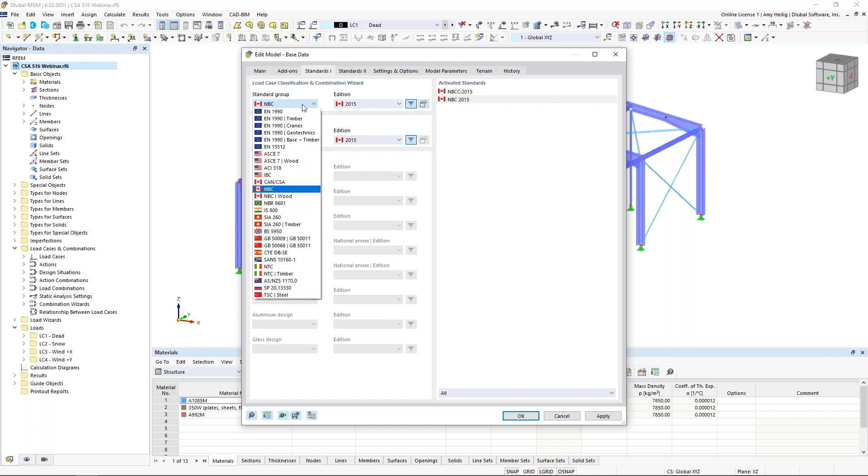Under the third tab, standards, we are going to generate our load combinations automatically according to the NBC 2015 standard. We are working in development on the 2020 standard, so that should be released fairly soon. But we also have access to all of our other international standards like the ASCE 7, the Eurocode, and many more.

So once this base data has been defined, we'll review the cross sections within the model. Over on the left, we can see all of the available cross sections here, including our moment frames, which are going to utilize W250 by 80 sections. We have some tube sections, HSS 127 by 127 spanning between these moment frames.

We have our lateral bracing here, which is going to be single angles. And then we have some pretty slender HSS columns at the front and the rear of the structure. Now notice that for these main moment frames here, these particular beams, we do have these set to a taper.

So if we double click on these under the second tab, we can define a taper for any of the members, either at the start of the member or end of the member, and some additional options here. We even can set the alignment here to the top of member.

So notice that the members start - I've converted this W250 by 80 to a parametric section and increased the depth to 500 millimeters, and then we transition back to the W250 by 80.

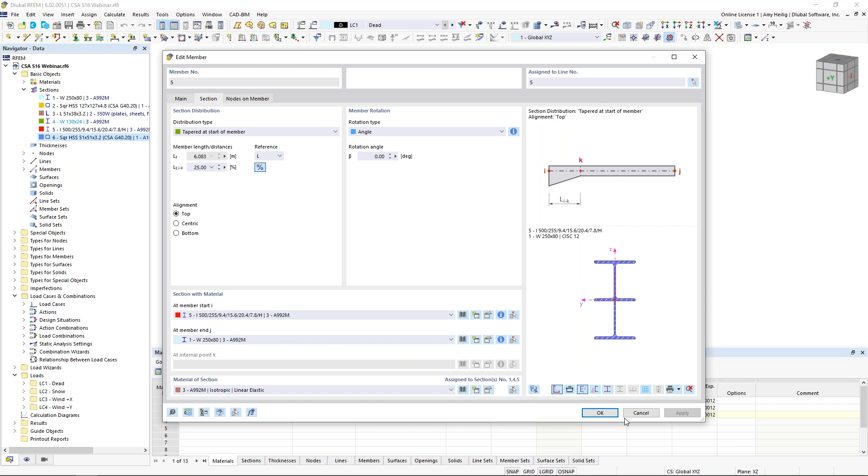We also have our materials listed here. So most of the HSS sections will utilize the A1085. Our single angles will be 350W, and our W sections will be A992.

What else is unique about this structure are the various member types. So if we visit our navigator and the second tab in particular under display, this is going to control everything that we're viewing here in the graphical display.

And if we scroll all the way to the bottom, we can actually render the colors of the model according to the member type. Notice these various member types are now color coded here. So we have our general beam elements, which is nothing more than just a standard beam or column.

If we double click on one of these, the member type is set here under this first drop down. We could activate hinges to release moment. If we leave this unchecked, everything is considered fully fixed.

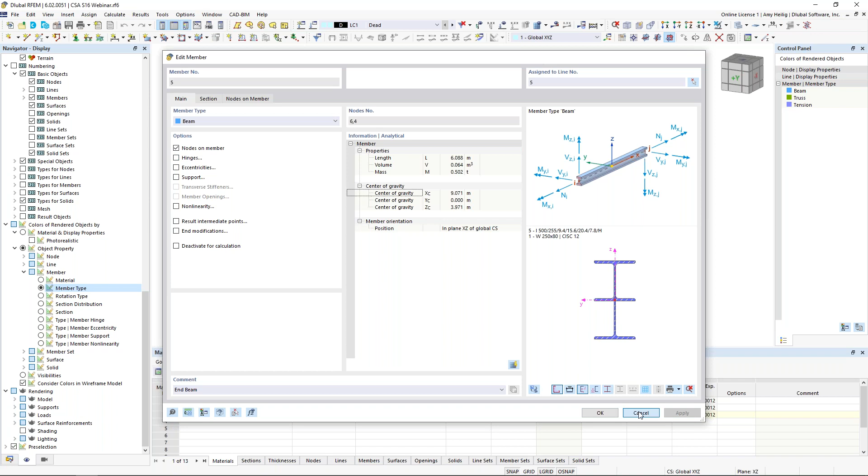But we also have what we call truss elements. So the member type is set to truss. Notice that this hinges option is now grayed out.

And finally, we have our lateral bracing here, which are tension only. So exactly as it sounds, these members can only take tension forces. If they have any compression, they'll be deactivated within the analysis. RFEM is that nonlinear analysis program, so if tension forces are reintroduced in a subsequent iteration, we can reactivate those members.

So now that we've gone over a little bit about the structure, including the sections and materials, let us take a look now at our loads and load cases. So I will activate here my load cases and combinations dialog box.

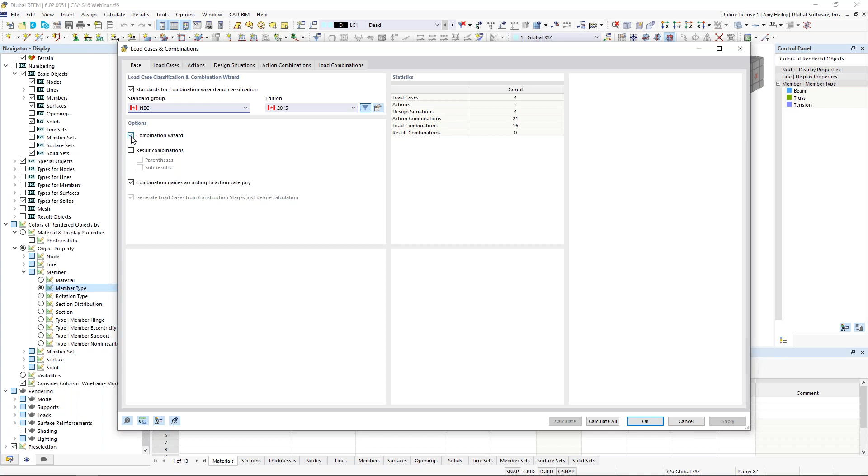Under the base tab here, this is just reiterating that we are going to generate our load combinations automatically according to the NBC standard. When this option is turned on, the program will automatically generate all of our load combinations according to this standard. Now, alternatively, we can turn this off if we would prefer to manually create the load combinations.

The load cases are listed here. So for example, 4 simple load cases for today, we have dead load with self-weight automatically turned on here. The action category is set to dead load. This is specific to the NBC. We also have snow load, wind in the X, and wind in the Y.

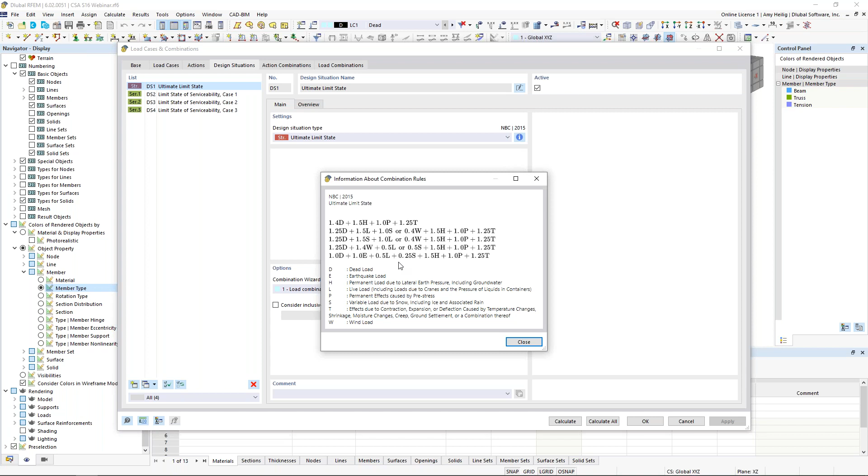So the program will automatically generate for us what we call design situations. These design situations are needed a little bit later on when we do activate that steel design add-on, but it also is going to group together all of our load combinations. So notice that we have an ultimate limit state design situation. This is going to be all of our factored load combinations. And if we'd like to see what this means or what it's referencing, we can click on this little info button here to see directly from the NBC standard those factored load combinations.

Now we have 3 serviceability design situations as well. Again, we can click on this little info button. These are going to be our unfactored load combinations. If we don't want to use all 3 serviceability design situations, we can always uncheck the active box in the upper right hand corner, or we could delete it altogether with this button down here at the bottom.

But notice for these design situations, we have the option definition set down here, and we'll actually be in this dialog box quite a bit today. I just want to point out that initially our static analysis settings are set to second order by default. If we use this drop down, you can see we can modify this to a linear first order, or if we have cable elements or fabric membranes, for example, then we would be running a large deformation analysis, but the default is second order to account for those P delta effects, so something to keep in mind there.

If we jump to the load combinations tab, we can actually see the individual load combinations listed out, again, each belonging to that specific design situation. So here in red, we have our factored load combinations belonging to our first design situation, and then all of our unfactored load combinations belonging to those 3 serviceability design situations.

Each one is showing here that it's going to be run according to a second order analysis because we've already defined that under the design situation. But by all means, you can come in here and make individual settings for each load combination if you prefer.

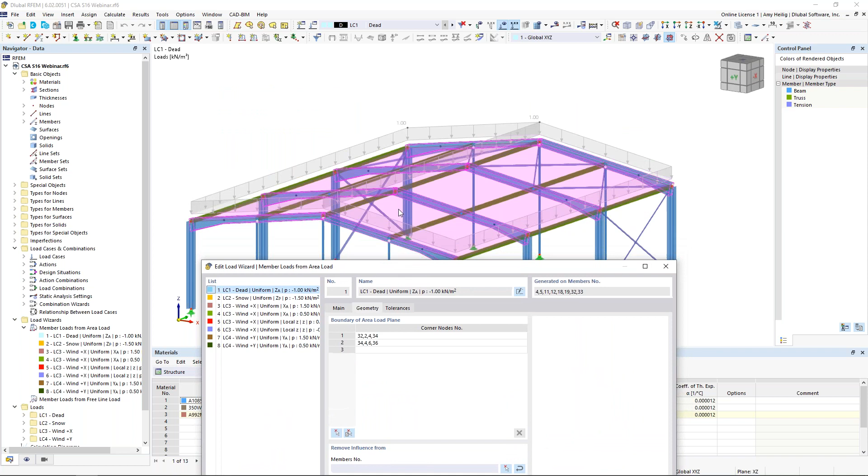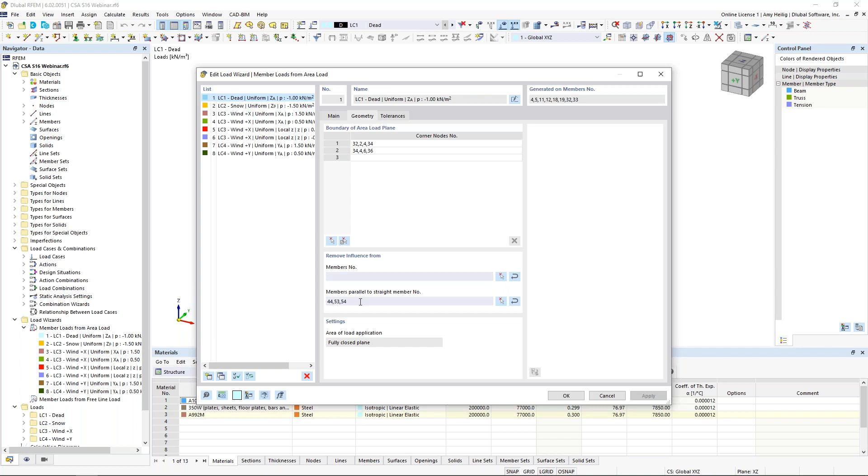I've defined the load magnitude at -1 kilonewtons per meter squared. Under the geometry, these are the 4 corner points that define the left plane and the right plane. I took this a step further so we can exclude members from this generated area load, and I graphically selected these 3 members here, which we can somewhat see on the left-hand side. Not only will the program exclude these 3 members, but it will also exclude all members parallel to it, which is a time saver so we don't have to individually select each member.

Once this is complete, we see this generated area load, where we can right click to display separately, and notice that my load is now being distributed only to those main moment frames here. The tributary area is automatically accounted for, so nothing further to do for dead load. We can right click and turn off the display separately to go back to the previous view.

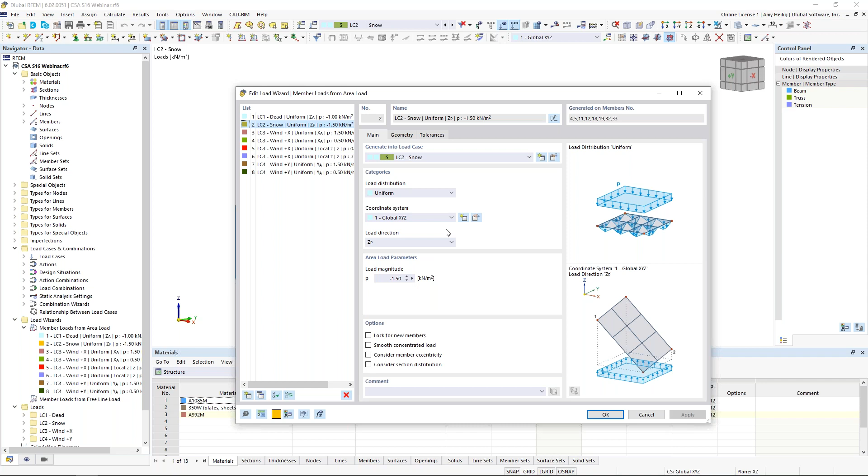As far as snow load, exact same concept here. The only difference is that I modified the load direction to the projected Z direction, so we can account for the angle of our roof and modify the loading according to that angle. The load magnitude was also adjusted to negative 1.5 kilonewtons per square meter, with the same geometry. When I take a look at this in the model and display separately, it should look fairly similar to our dead load, just with an adjusted load magnitude.

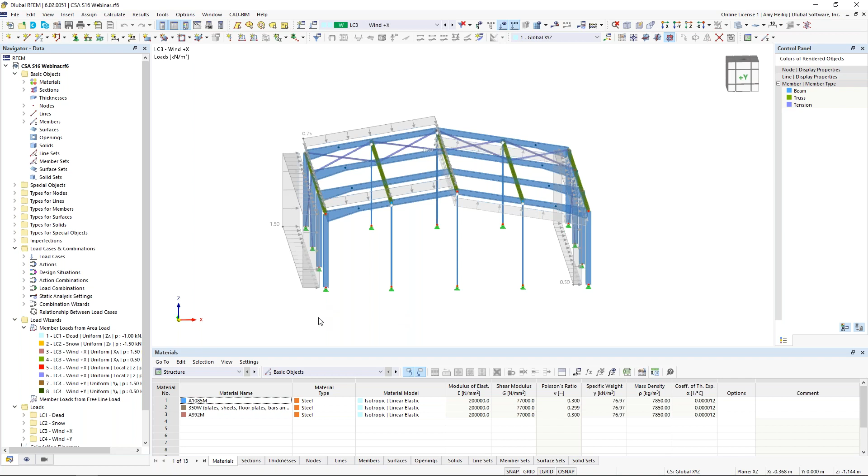Now, finally, we have our wind load. We are working in development to generate wind loads automatically, as well as snow loads, according to the NBC standard. They will be available under the load wizard, and we hope to release that fairly soon. For now, we need to manually apply these loads to the structure, and I've done so with those same member loads from area load generator.

You can see here I just modified where my planes are located, as well as the magnitude. We can right click here to display separately. We're assuming our wind load is flowing from left to right based on the global x-axis, and we can see all of those member loads assigned here.

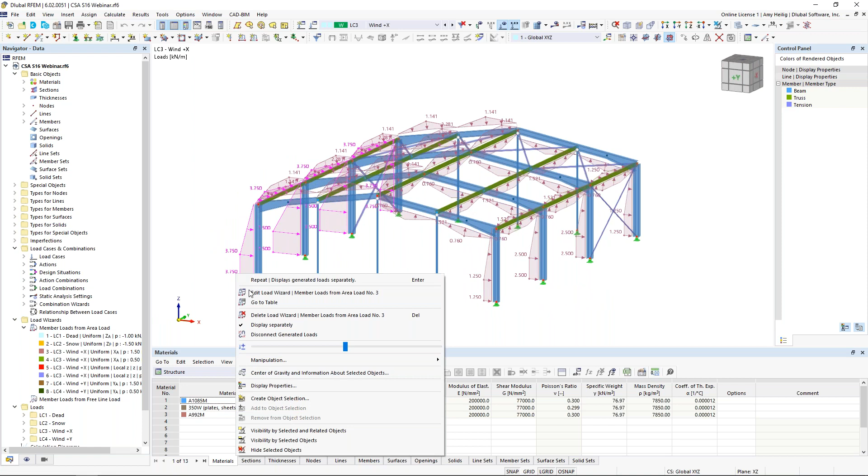We can also take a look at wind in the Y direction. We're assuming wind flow here from right to left based on the global Y axis. Again, right click to display separately, and we can see those member loads attributed to each of those vertical members as well as horizontal members for this particular plane.

Now that we have applied all of the various loads under the specific load cases, we can view our load combinations, and we have the ability to display all of these loads on the structure at once, including the applicable load factors from the NBC.

I would suggest doing this early on in the model: complete most of the modeling and the loading, and it's always a good idea to run a quick calculation before we get too far into it, to ensure that we don't have any modeling errors.

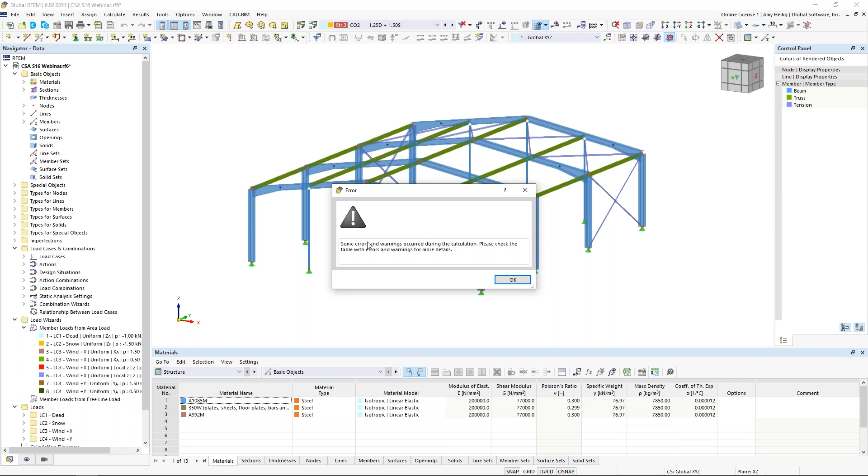So what we can do is jump to load combination number 2 here, 1.25 dead plus 1.5 snow, and I'm just going to run this single load combination. When I run the calculation up here in my toolbar, what we'll immediately notice is that the program doesn't solve. We get an error message saying we have some errors and warnings, please check the table. When we look at the table and click down here in the cell, we see that the program is telling us the stiffness matrix is singular.

The structure is unstable about FE mesh node number 59, about the global x-axis, and we can see where that red arrow is pointing. That red arrow can actually help us troubleshoot instabilities a lot of the time, but that's not always the case.

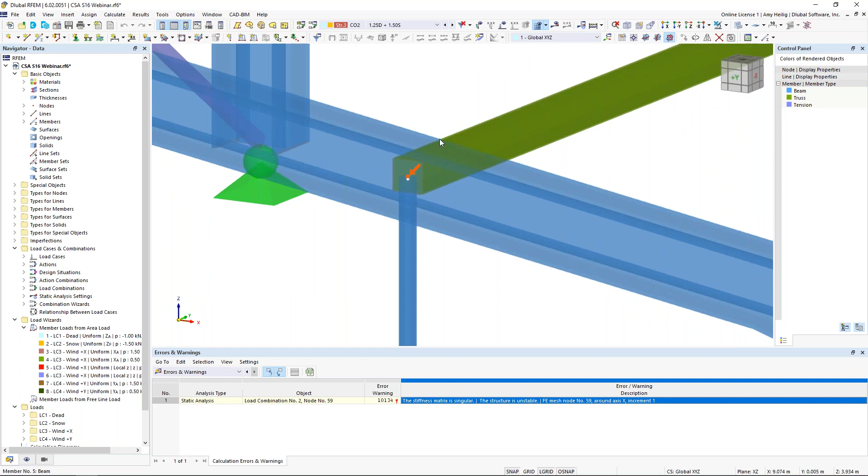If we have more of a global issue, this red arrow may not be so helpful. But in this particular case, if we zoom in, we see that everything appears to be connected properly. We just have this pretty slender column framing up into the beam with our HSS tube in between frames. So I really don't know how to troubleshoot any further just by simply viewing the model. This is where we want to take advantage of our first add-on, so I right click under my base data to go back to this dialog box that we previously saw.

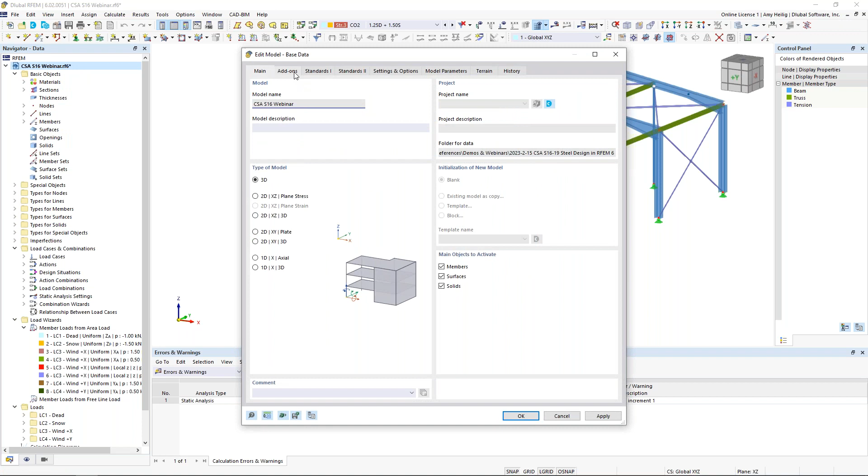Under the add-ons, we'll make the clear distinction here that we now want to activate the structure stability add-on. When I click OK, everything seems like nothing much really changed within the model.

What we can do now is go back to the load cases and combinations dialog box. Under load combination number 2, we now have the ability to calculate the critical load utilizing that structure stability add-on. When I turn this on, we have some additional settings in this dialog box that pops up. The stability analysis add-on will actually run an eigenvalue analysis, and we can view all the different eigenvalues set here.

The problem is if I try and run this calculation, I'll get another error simply because load combination 2 doesn't solve either. So we have this feature on the right-hand side where we can calculate without the applied loading to check for instabilities by the mode shape.

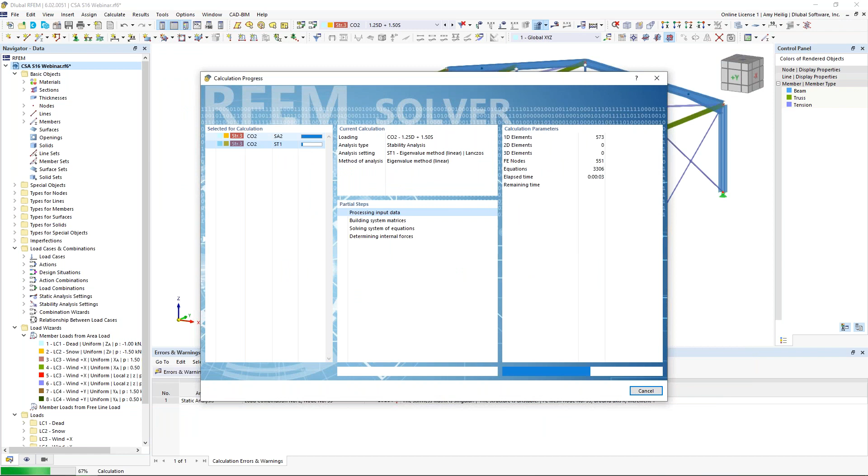Notice the number of eigenvalues is now grayed out. We leave this option active, I click OK, and I can click calculate while I'm here within this dialog box. Once again, we solve for load combination number 2. We still get an error, but now we do have some results for that stability analysis add-on.

And we immediately see where the problem lies. It almost appears as though this column is not connected to the member. Well, perhaps I turn off my results here and go into a wireframe view and zoom in much closer than what I was previously.

I actually see that these two nodes are not connected. This is a simple fix where we can just drag and drop that node to connect to that particular beam, and that should address the issue. So we can see how that stability analysis add-on can be used here to troubleshoot unconnected nodes, for example.

So now that we've corrected that modeling error, let us go back to load combination number 2 here, and we'll turn off the structure stability add-on. We'll try and calculate once more.

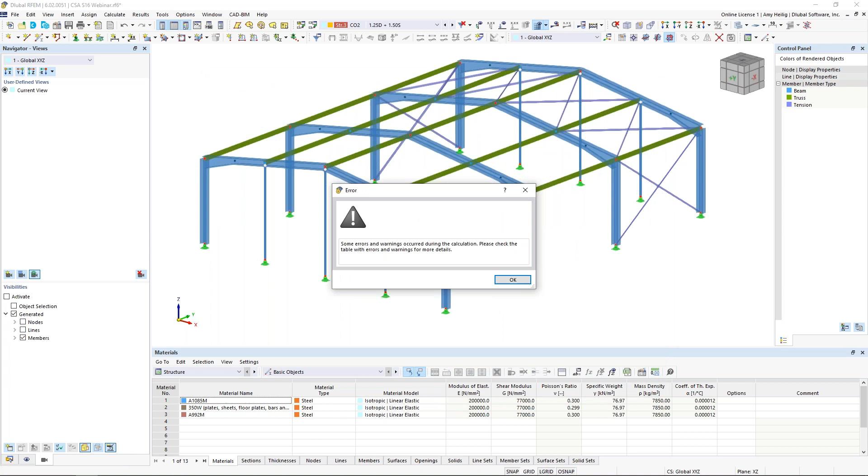So we've addressed that modeling error, we run the calculation, and unfortunately what we see is still another instability. I click OK and I click down here in my error message, but notice that my red arrow has now moved. I have an instability about FE mesh node 128 about the global axis X.

Well, at this point, I've already ruled out any modeling errors. All the nodes are connected, so all the supports are connected. So what can we do here?

Well, the first suggestion is remember that we're running load combination number 2 here according to a second order analysis. The best approach, if we've ruled out modeling errors, is to change this single load combination to a first order analysis. Let's see if the model solves by changing this analysis type.

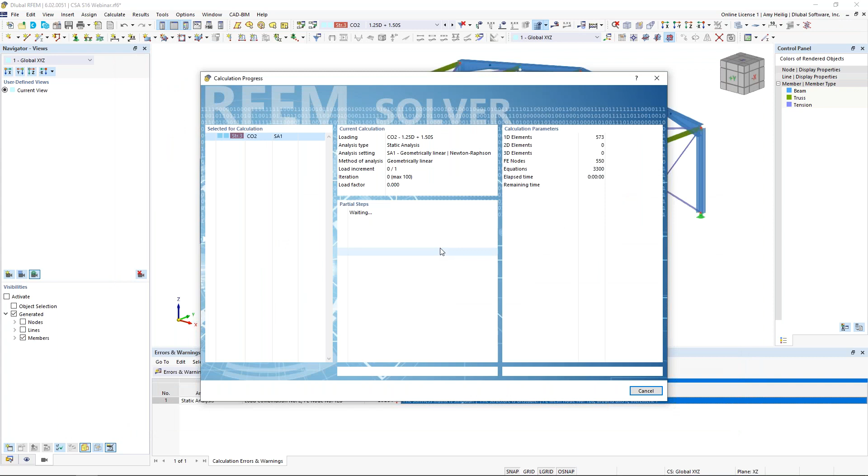So we click calculate, and what we see here is actually that the model solves just fine under first order. So now we need to move on to troubleshooting for this second order analysis instead.

Well, once again, we can take advantage of the structure stability add-on. So we reactivate this for load combination number 2. Let's go into the detail settings here. Now I'm going to turn off this option on the right-hand side.

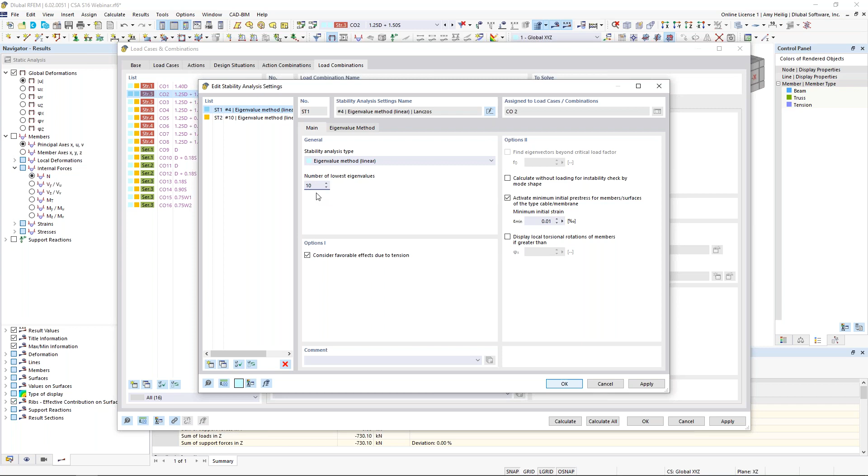The reason why is because we can run an eigenvalue analysis, since load combination number 2 solves just fine under first order. Perhaps we increase this to show the number of lowest eigenvalues as 10. We click OK and we click calculate.

So the program will run through that first order analysis, but now it's going to run an additional eigenvalue analysis to show us the first 10 failure modes of our structure.

So we use our drop down on the left to not look at the static analysis, but let's take a look at the stability analysis. And sure enough, here are our 10 different eigenvalues shown here in the drop down. We also see it down here in our table under stability analysis.

The first failure mode shape looks to be this very slender column buckling in plane. If we look at the second mode shape, same column buckling out of plane. We take a look at the third mode shape, and it seems to be the same column just on the other side. If we look at the critical load factor, we immediately see what the problem is: it is 0.67.

This means that the structure can only take 67% of the loads from load combination number 2 before we see this flexural buckling failure of these slender columns. So anything under 1.0 is always a problem. So how do we address this?

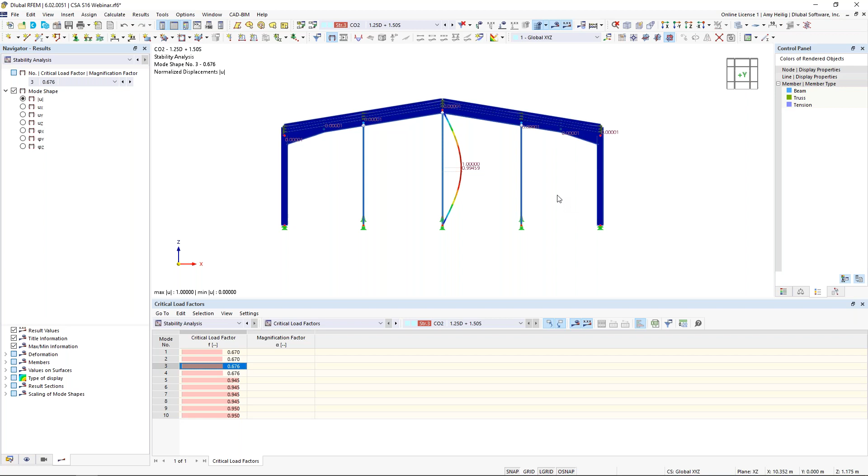Well, probably the easiest fix is to increase these cross-section sizes. I think we can all agree just by looking at it, they're much too slender. So let us highlight all of these members.

We can double click here, and under the section, we can use our drop down to change these to an already defined cross section in my model, a W130 by 24. So let's completely change this to an I-beam here. I click OK. It's asking me to clear my results. That's fine. And now we can see the structure looks quite a bit better without those very slender members.

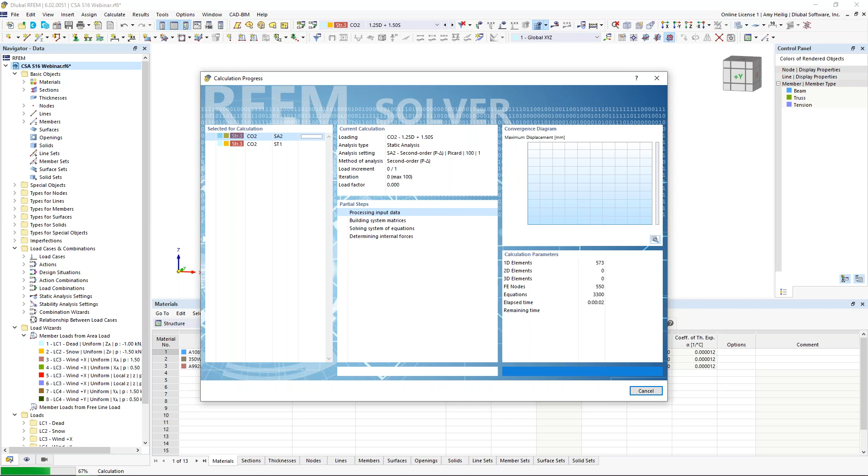So we go back to load combination number 2. We change this back to second order, and we can go ahead and run the structure stability add-on just to see how our results vary. When we modify this, what we see here is that second order should solve just fine.

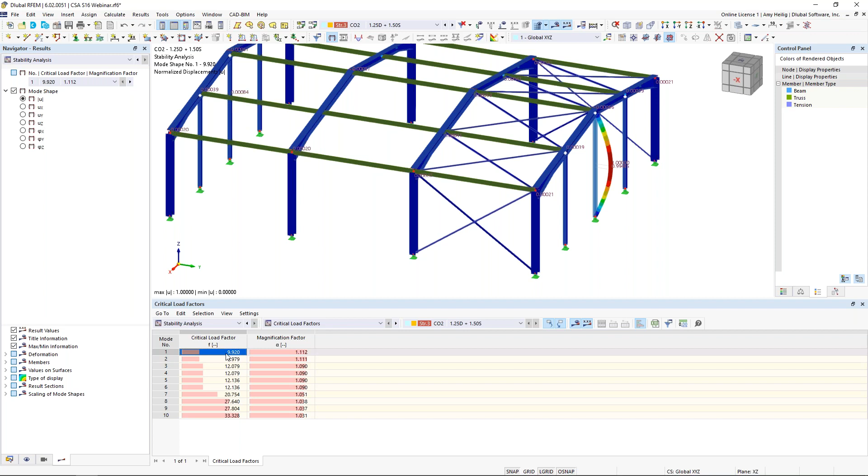We also see here the stability analysis. So we're taking a look at the static analysis. If we jump down to the stability analysis once again, and we take a look at our first failure mode, it once again is this column. But notice that my critical load factor is now 9.92. So what this means is that the structure can handle over 900% of the loads from load combination number 2 before we see some stability failure mode as we see here.

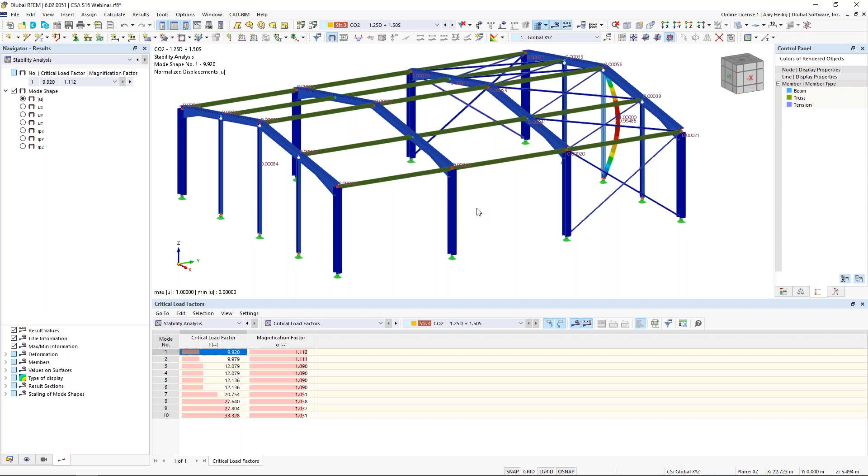So again, that structure stability add-on can be incredibly helpful, not only for simple modeling errors of unconnected nodes, but when we're trying to troubleshoot something that we really can't determine just by looking at the model itself, such as failure modes under stability, we could certainly utilize that add-on.

All right, so now that essentially our modeling, our loading is complete, let us jump back to the PowerPoint here, and we'll discuss specific to the 2019 standard stability considerations.

And we know in clause 8.4, the code tells us that the structure absolutely has to be defined or designed for stability. Looking at 8.4.1, the code tells us that stability shall be provided for the structure and all elements of the structure, considering topics such as deformation, second order effects such as big P delta, little p delta. We have geometric imperfections, stiffness reductions, and uncertainty in strength and stiffness.

Well, within the code, in particular clause 8.4.2, we are given two methods for the analysis and design for stability. The first is this simplified stability analysis method in 8.4.3. So for those of us that have been doing steel design for quite some time according to the CSA standard, this is probably nothing new.

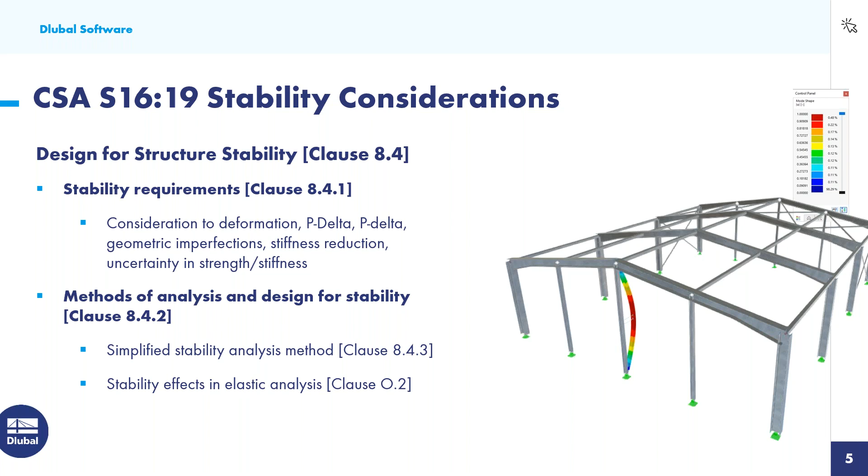But within the 2019 standard, we know that there has been an alternative method added, which is stability effects in elastic analysis in Annex O, which is laid out in clause O.2. And this is what we're going to be focusing on today and how we can apply that directly to our structure. But before we do, let's discuss the simplified stability requirements.

And this method, again, is given in 8.4.3. The first requirement is P delta effects. This is explained further in 8.4.3.2, and we have two options to consider these second order effects. The first is simply a second order analysis, and we saw back in RFEM for our load combinations as well as what we set under the design situation that all of those load combinations will automatically be solved for according to second order. So this is certainly our approach here.

The alternative method is to apply what we call the U2 amplification factor, and this is given in 8.4.3.2b. So we take this amplification factor and we apply it to the member's axial loads and bending moments from the first order analysis. So perhaps your software only has the capabilities for a first order analysis, or you're doing hand calculations, then you would probably be utilizing this U2 amplification factor.

Now, the second requirement under the simplified method is the notional lateral loads in 8.4.3.3. Actually, let me back up one second. I did want to discuss here P delta effects in this diagram over here on the right-hand side. So we all should be familiar with P delta effects. And again, within RFEM's approach, all of this is kind of done under the hood here to account for this. But we have this vertical member here with the applied gravity load P. And with this applied gravity load, we may have additional lateral loads V.

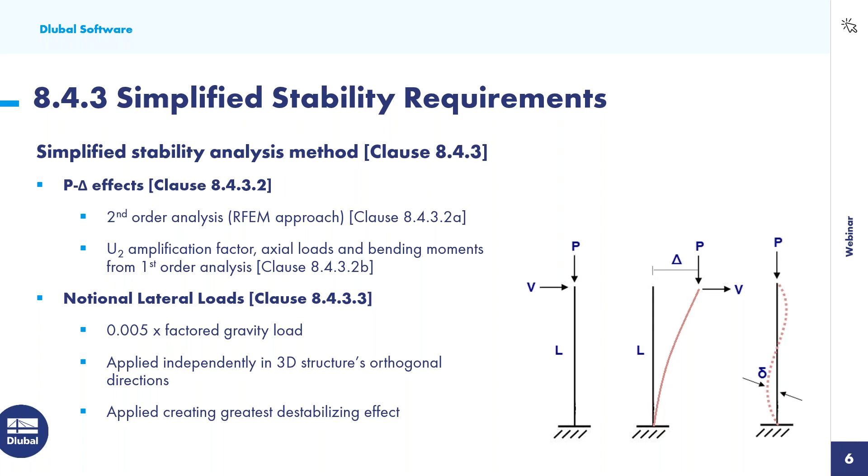And one last thing to keep in mind is that if we are applying notional loads to the top of the member, we do want to apply an equal and opposite load to the bottom of the member to correct that fictitious horizontal reaction at the base of the member. We don't want to over design our foundation here. This is really for the member design.

Okay, so now that we have taken into consideration the simplified stability analysis, we have this alternative now in Annex O laid out in Clause O.2 for stability effects in the elastic analysis. And there's several requirements, some similarities, some differences here from this simplified method. The first is geometric nonlinearities for second order effects according to O.2.2.

So we do want to account for big P delta here, and we saw this on the previous slide. The program will automatically account for that, no problem. But it does also mention P little delta effects that the simplified method did not. So there are conditions to neglect P little delta effects, and these are laid out in O.2.2 A through D.

So if you do meet those requirements and you are designing according to Annex O, perhaps you don't necessarily need to consider P little delta. If you do include P little delta, the advantage here is that this factor given to us in Chapter 13, which is under member axial compression and bending design, U sub 1, we can set this equal to 1.0.

Well, this factor is used to account for second order effects due to deformation between the member ends. So again, the advantage of including P little delta in the analysis is that we can automatically set this factor to 1.0. So we might be wondering, well, we know probably RFEM includes big P delta, but does it include little P delta as well?

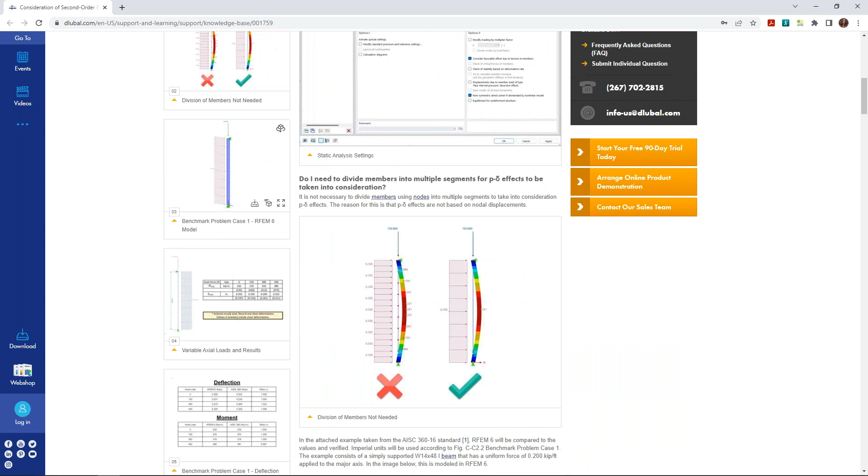So we've taken an RFEM model and we've actually compared it to the benchmark problem set forth within the AISC 360. And what we found out is that P delta is automatically included, both big P delta and little P delta. And the advantage of RFEM is that you don't need to subdivide the member into multiple segments. You don't need to add additional nodes along the member length. You can keep this member as one continuous segment, and that P little delta will be accounted for.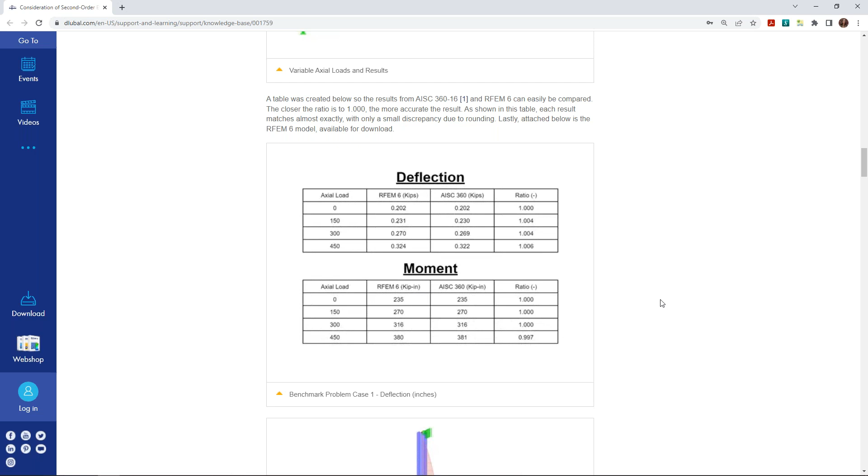And if you're interested to take a look at this article, you can zoom in here and we can actually see the ratios comparing the AISC to RFEM, and we see those ratios are very, very close to 1.0. This PowerPoint will be available to you on our website after the presentation, again, with the hyperlink to this knowledge base article if you'd like to check that out further.

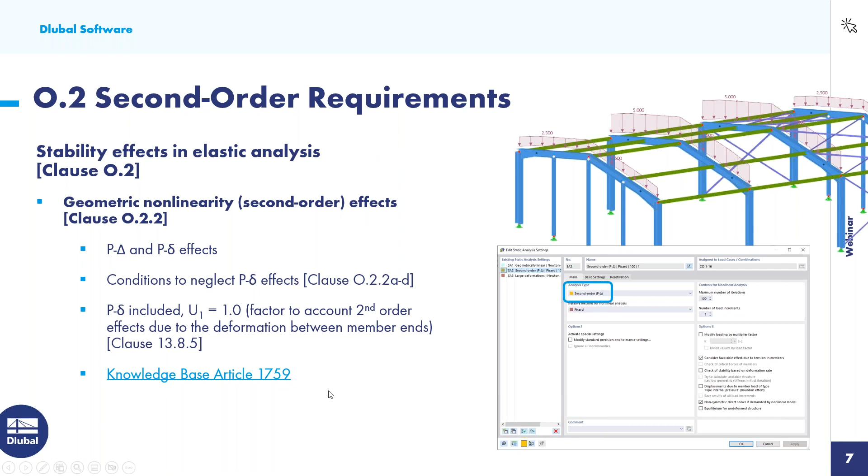All right, let us move on to imperfection requirements. So geometric imperfections are addressed in Clause O.2.3, and the code tells us that member and local geometric imperfections can be neglected for the elastic analysis.

When we're talking about member and local geometric imperfections, I put a little picture over here on the right-hand side. This is really looking at the individual member itself. So perhaps we convert the 1D member into 2D surfaces for an FEA analysis, and we directly modify the FE mesh to consider topics like manufacturing defects. Well, when we're designing according to Annex O, we can actually neglect these. Rather, we're concerned with global geometric imperfections, and there are a couple of listed methods for these.

Now, before we look at these methods, there are a couple of criteria where we can completely neglect global imperfections for lateral load combinations only, and these are listed in O.2.3.1. The first is if gravity loads are primarily supported by vertical elements. The second is if the first to second order story drift ratio with reduced member stiffnesses is less than 1.7.

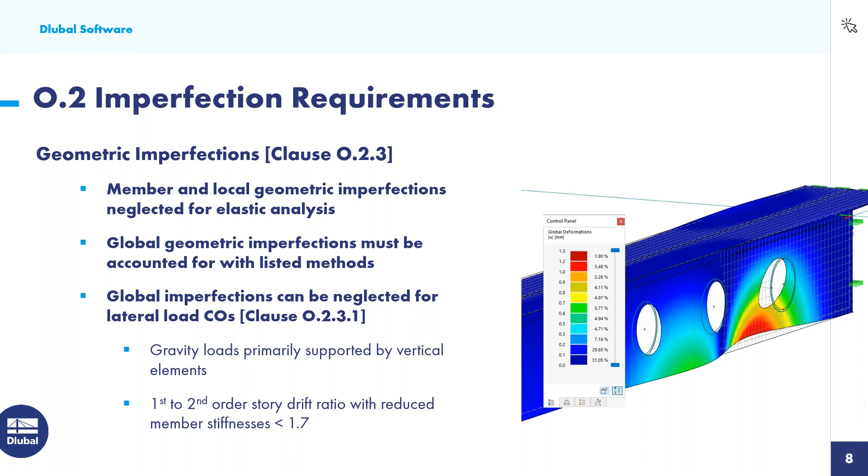So we'd want to reduce our member stiffnesses. We'll get into this in just a few minutes. We run the first order analysis, and then we change that analysis type to second order. We take a look at the story drift. If we meet these ratio requirements, then we can also neglect those global imperfections.

Now, if we do need to consider the global imperfections, again, there are two methods for this. The first is direct modeling in O.2.3.2. This is where we would physically displace the member intersection points. And for this, we'd probably refer to the permissible erection tolerance values set forth in clause 29.3. We're mainly concerned here with column out-of-plumbness tolerances, and that limit is set at 1/500.

So what we would physically do is go into our RFEM model and create that column out-of-plumbness by modifying the intersection points. Now, you can imagine this is difficult and it's going to require multiple different models. Again, if we're trying to create that greatest destabilizing effect, we should have column out-of-plumbness in the X direction for winds in the X, column out-of-plumbness in the Y for winds in the Y. If you have seismic loads, it could go on and on.

So rather, the alternative method number 2 with notional lateral loads is probably the easier approach, laid out in O.2.3.3. Now, we've already discussed notional lateral loads under the simplified stability method. A lot of similarities here.

But notice one big difference: we're actually going to take our factored gravity load and multiply it by 0.002. So we might be wondering, well, why does the simplified method have that factor set at 0.005 versus the 0.002 factor in Annex O? Well, the 0.002 factor only accounts for the effects of global geometric imperfections, whereas the simplified method with 0.005 accounts for the global geometric imperfections, but also accounts for other effects such as inelasticity. So that's why we're seeing that difference here with that modification factor.

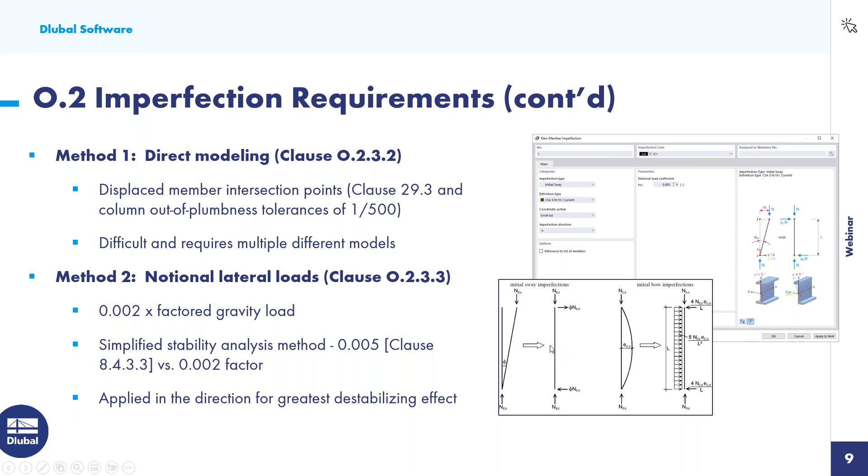So we will go back here to the RFEM model to see how we can apply those notional loads to our vertical members here. Well, I'll begin by selecting all of my vertical elements by holding down my shift key, and I'll create a user-defined visibility here for only my columns. And I'm going to right click, and under the right click options here, we can turn on our local axis system of each member. Now, to apply the notional loads, we go back to our navigator, and what we should see over on the left is a folder called Imperfections.

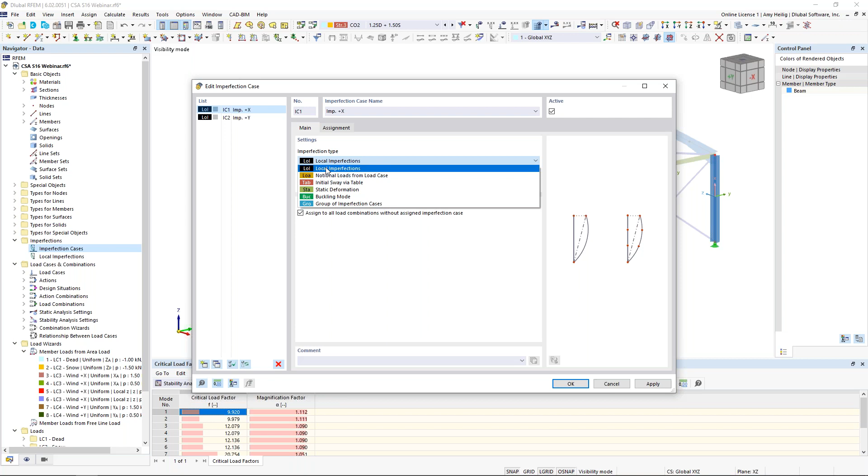The first option under this folder is Imperfection Cases, where we can right-click to create our new imperfection case. The first case is going to be imperfections in the positive X direction, and our second imperfection case is going to be imperfections in the Y. With these imperfection cases, we have many different types available, but we're focusing here on local imperfections applied directly to the members.

Under the assignment tab, remember we're creating the greatest destabilizing effect, so my imperfections or notional loads in the X direction should be assigned to my wind in the X direction, and my imperfections in the Y should be applied to my wind in the Y. Notice all of our generated load combinations are already listed here in the background, and the program's intelligent enough to apply these imperfections to our gravity load combinations. My imperfection in the Y will only be applied with my wind in the Y - we'll never see imperfections in the Y applied with wind in the X. This would just create more load combinations that aren't going to be controlling, so it's not something we need to include.

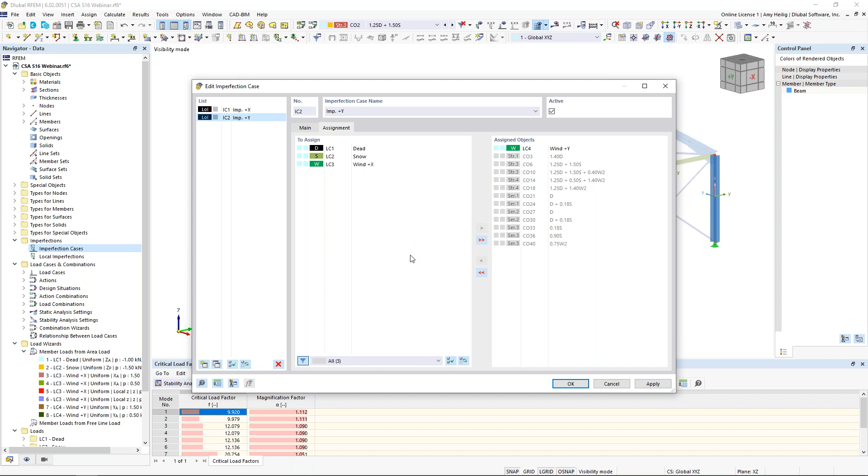So once we have created the imperfection cases, we click OK, and it's asking me to clear my results. We should now see those available under the local imperfection tree option over on the left.

We actually need to now apply those notional loads to each of these vertical members. Under my first imperfection case in the X, I can double click on member imperfections to open up this dialog box. The imperfection type is initial sway - remember, we talked about initial bow, but we're going to focus here on the initial sway. The definition type can be set to the CSA S16.

Now there's two options here, current or gravity load. When we select current, the program is simply going to take the applied gravity loads in the current load combination to apply the notional lateral load. Alternatively, if we chose gravity load, we could import the axial forces from some other load case or combination, perhaps to take a little bit more conservative approach and apply the notional loads for the worst case consideration. We'll be utilizing the current option here.

Now we need to apply these notional loads based on the member's local axes, which we've turned on here in the background. So the imperfection direction in the global X direction will actually be the member's negative Z axes, which we can select here within this dropdown. Now the notional load coefficient, 0.005, is the default from the simplified method - let us modify this to 0.002 from Annex O.

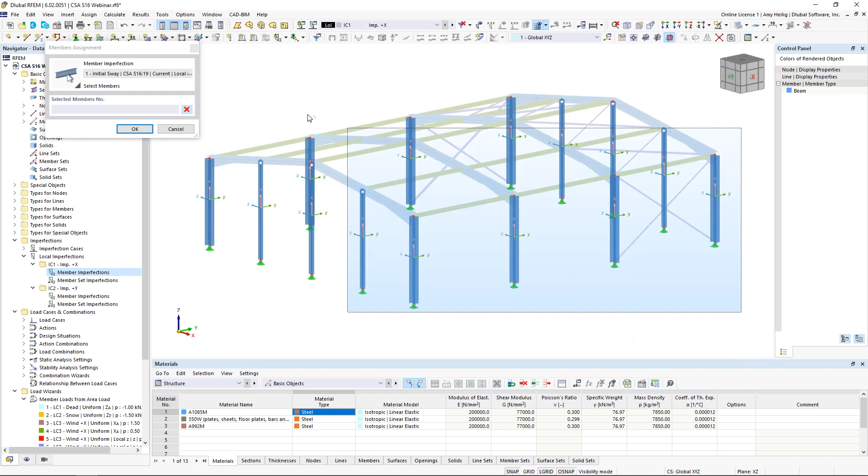And then we can graphically select all of our vertical members shown here. You can see they're now listed. I click OK, I click OK. I can cancel out of this visibility mode and turn on the display of my imperfections to now see this column out-of-plumbness in the global X direction.

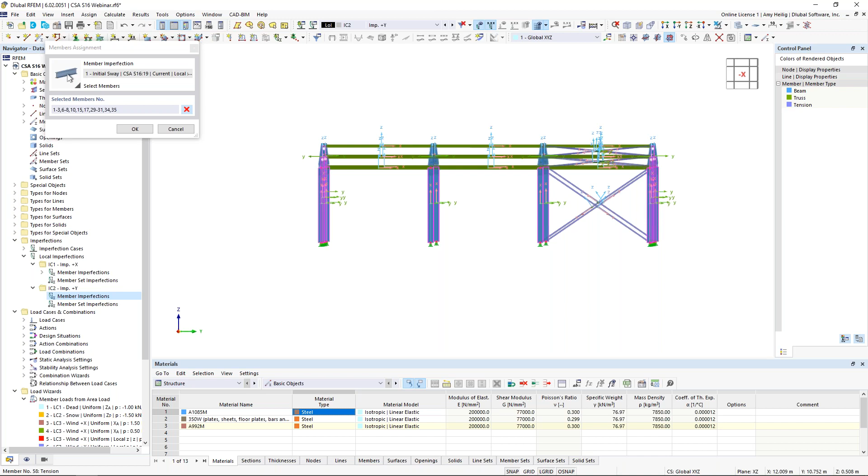We do the exact same thing for our imperfection in the Y. It's going to be the initial sway with the definition type of the CSA S16. The difference here, though, is that we now want to apply this in the member's positive local Y direction from our dropdown. We are going to modify the load coefficient to 0.002, and then we are going to apply this to only our vertical members here - notice I'm not applying to any of the additional members, but only those vertical columns.

I click OK through these dialog boxes, and now we see the out-of-plumbness in the global Y direction. So I can right click here to turn off the local axis system - we've now applied those notional loads to the member.

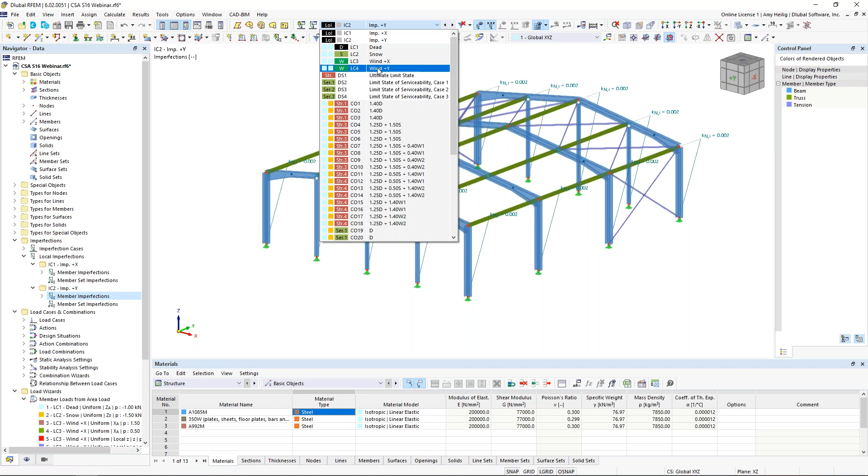There's one more quick step that we want to look at here. If we drop down to one of our load cases or combinations, we can choose the button here to edit the active load case to bring us back into our load cases and combinations. Under the design situations, remember I said we would be in these options quite a bit today - let us take a look at the definition type here for a combination wizard. Remember that we have set this to second order analysis, already meeting those requirements from the CSA standard.

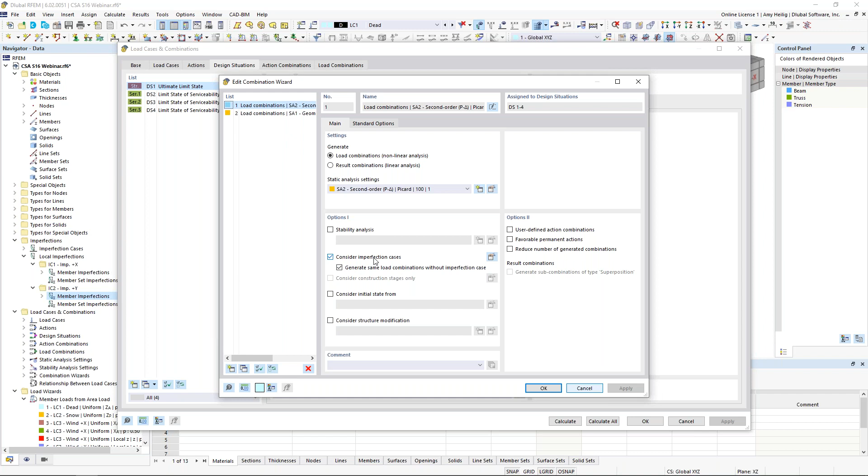We also have the option turned on automatically to consider the imperfection cases, so those imperfections will automatically be considered for all of my factored load combinations. But here's the problem: all of my serviceability design situations and load combinations also utilize the same definition number 1 here.

I do not want to apply those imperfections to my serviceability load combination. So how can I modify that? It's quite simple. We can just make a copy of this existing definition number 1, so now we have our new definition number 3.

We're still running according to second order analysis, but I'm going to turn off my imperfection cases. I click OK, and now from my serviceability design situations, I hold down my Shift key and use this drop down to assign them to definition number 3 that does not include imperfections. But if I go back up to my ultimate limit state, it's utilizing the first definition type that will include the imperfections.

Now if we look at our load combinations, we see quite a few more for our factored situation. For example, looking at the first three load combinations, they look identical with 1.4 dead. But notice the first is 1.4 dead without any imperfection, the second is 1.4 dead plus imperfection in the X, and the third is 1.4 dead plus imperfection in the Y.

So when looking at some of these additional lateral load combinations, we should see one without the imperfection, but the first, when in the X, will only include imperfections in the X, and when in the Y will only include imperfections in the Y. The program has the intelligence to correctly apply those imperfections to the correct load combinations. If we jump down to our serviceability, notice imperfections is turned off for all of them, and that's exactly what we wanted.

Okay, so now that we have applied the notional lateral loads to the structure, let us go back to the PowerPoint to discuss the final requirement of reduced stiffnesses.

Reduced member stiffnesses are addressed in clause O.2.4. These are to account for initial geometric imperfections—remember, we neglected those with the global geometric imperfections on the previous slide. We also want to account for inelasticity and uncertainty in strength and stiffness. So how we do this is we apply a couple factors to the member's axial stiffness, EA, as well as the member's flexural stiffness, EI.

We will find here a lot of similarities to the AISC Chapter C direct analysis method. One big difference, though, is that in AISC, tau sub b is only applied to the flexural stiffness. The CSA, on the other hand, applies tau sub b to both the axial stiffness and the flexural stiffness. So that's one difference between those two standards.

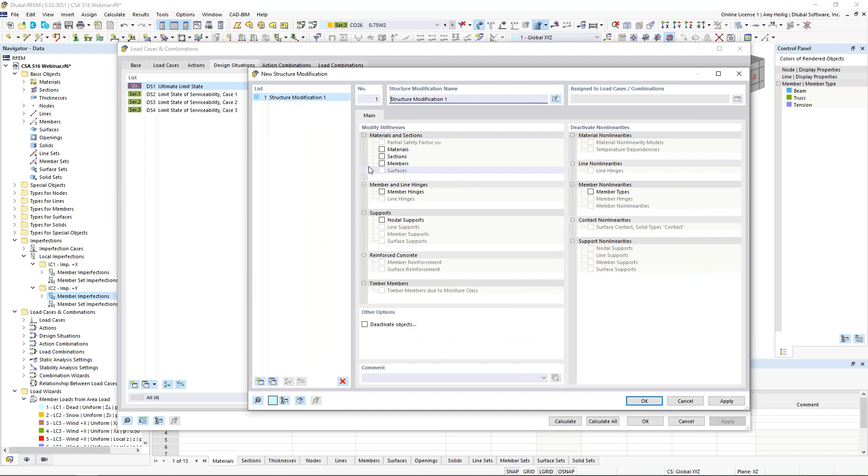We're going to turn this on for this first definition type here, and we create a new setting that's going to be applied specifically to our members. We get a new tab here for members, and we use our drop-down box to create a new member stiffness modification. Now we have this additional drop-down here where we can directly select the CSA S16 standard, giving reference directly to clause O2.4.

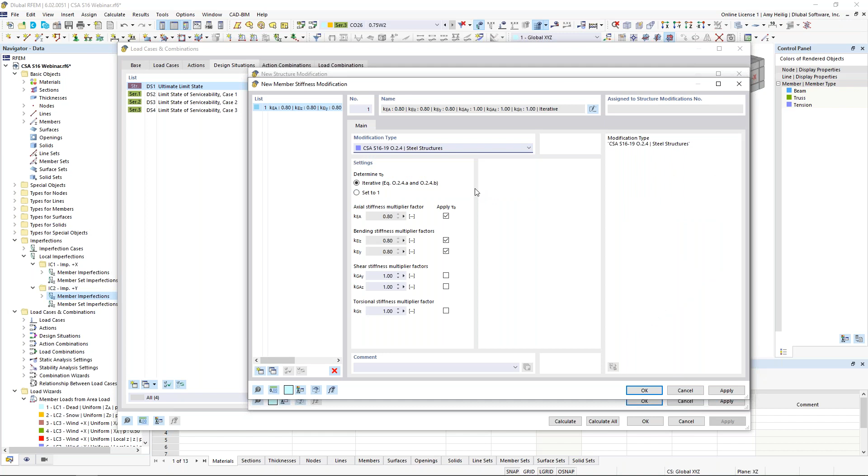This is where the program can actually apply and determine this tau sub b based on these iterative equations set forth in Annex O to each individual member. Alternatively, if we want to just use 1.0, we can set that to 1.0 for tau sub b for all members or whichever members we select. But for now, we'll leave this as the iterative option here to refer to the standard equations.

We also see that 0.8 factor, so both 0.8 and tau sub b will be applied to the axial and bending stiffness. If we've decided too that the shear and torsional stiffness contribute to the structure's lateral stability, then we'd want to go ahead and turn those on as well. But by default, these are turned off.

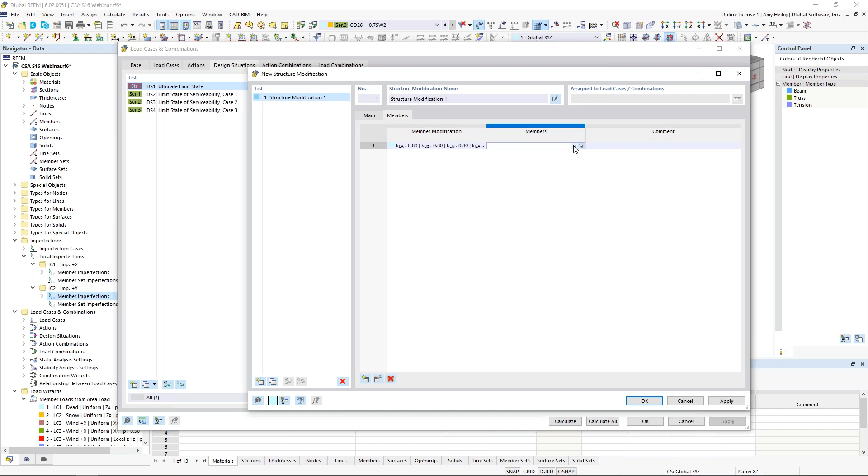So once we've created this definition specific to the CSA standard, we would want to apply them to the specific members within the model. If you remember, the code says to go ahead and apply it to all members. We could graphically select it with this pointer option, or we could use our drop-down box here just to select all. So now that stiffness reduction will be applied to all members within the model.

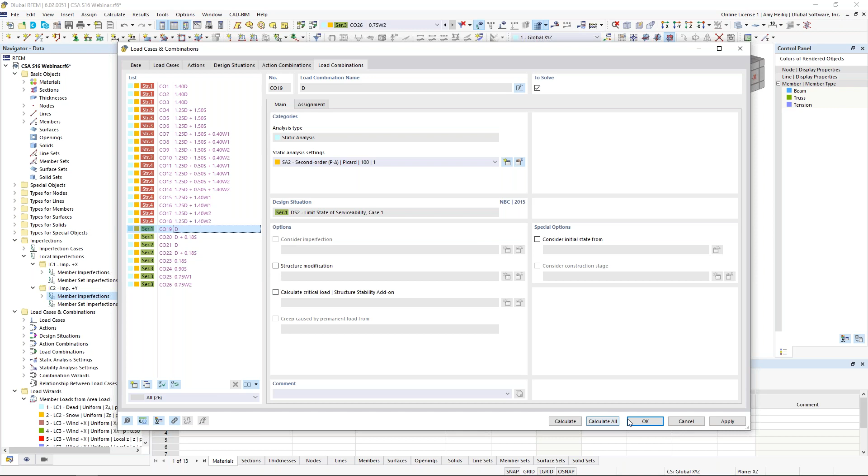We click OK, but notice my third definition type here that's assigned to my serviceability, we leave this unchecked. We want the full stiffness to be used. We click OK. Under the load combinations, what we see here is that structure modification activated for all of our factored load combinations, but under our unfactored load combinations, that option is turned off. So now we are complete here with those stability requirements from Annex O.

I want to move into the actual steel design add-on. So what we will do here is to right-click and open up our base data, and under the add-ons, we will now activate steel design. Everything that you've seen up until now, with the exception of addressing those instabilities where we use the structure stability add-on, has all been within RFEM alone, including imperfections and stiffness modifications, that's all within the main program.

So we're activating here the steel design add-on. Under the standards, you now see steel design available to us here according to the CSA S16. The steel design also has access to all international standards as well, so when you purchase this add-on, you'll have access to the AISC, the EC3, and other international standards shown.

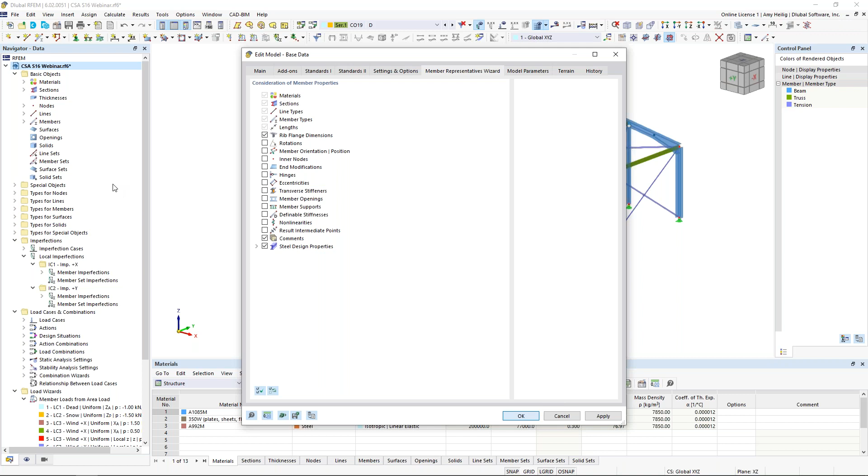The additional setting that I'd like to turn on is under settings and options, we have what's called member representatives, and we get a new tab here. Member representatives are just going to group together similar members that have the same material, the same cross-section, the same length. We can even turn on some of these optional options here, such as the comments, which I have turned on for our model today. So when we turn on member representatives, what we should see here over on the left-hand side is this new option, again where the program has grouped together specific members that are really identical.

So how is this going to be an advantage for us? Well, first of all, we've activated the steel design add-on. Let us highlight every single member here within the model, and I'm going to double click on it, a single member, and notice all members are currently selected within this dialog box.

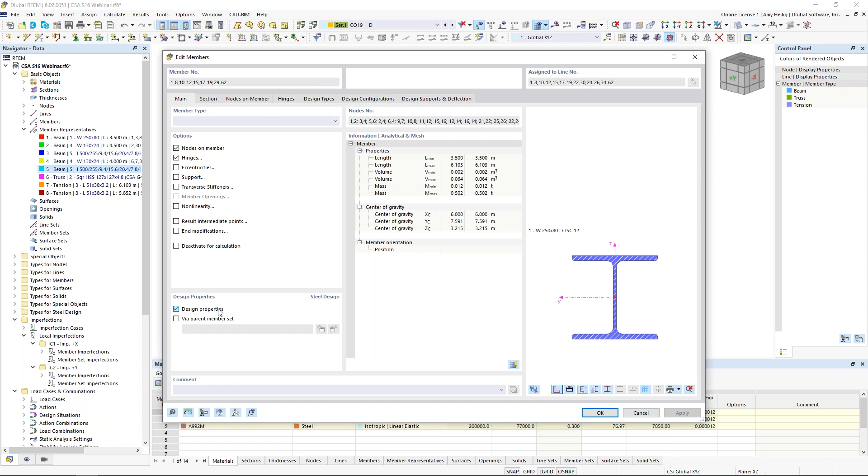Because we have activated that add-on, we have additional options here called design properties, and we specifically call out the steel design add-on. When the design properties is turned on, we have these additional tabs up at the top to define information specific to the CSA standard, as well as information such as unbraced lengths. When we have this option turned off, all those tabs disappear, and we are purely going to run an analysis only on those members, so no design. For now, if I leave all of these options off, we would just be running the analysis only.

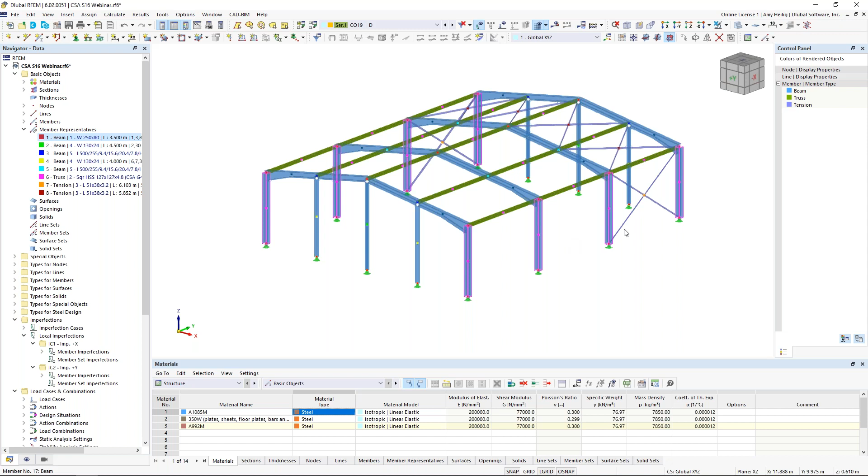But here's where these member representatives come into play. First of all, we'll start off with this first group of members. Member representative number 1, it's all of my exterior columns here. I double click on the member representative.

Notice that it includes all of these members grouped together here. So if I go into the edit settings for each individual member, I'm going to turn back on the design properties for only these columns, and I get these additional tabs. Now, I'm not going to fill out these additional tabs for each individual member. Rather, when I click OK, I get those exact same tabs under the member representative now.

So what's the advantage of this? Well, if I need to make any changes to unbraced lengths, for example, rather than having to select each individual member and make those changes individually, we can go into this member representative and make that same change once, and it will apply it to all of these grouped members together.

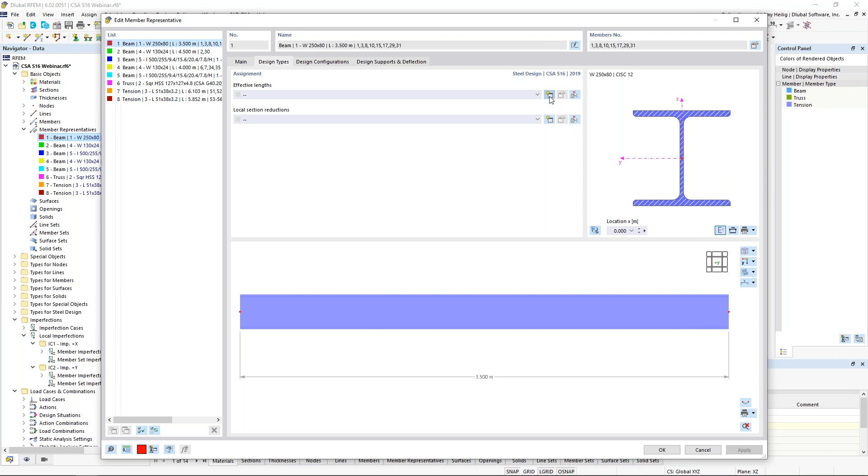So we begin with what we call the effective lengths definition type, or unbraced lengths. Now I create my first definition type here. And a little tip is that if we create the first definition type, notice that I don't have any members initially assigned to it. When I click OK and I go back in here to edit that definition type, all of those members are now populated that belong to this member representative.

The reason why I do that is now I can toggle this picture here to actually see a little visibility of each of these members that I'm currently setting these intermediate supports for.

So when we're talking about stability design for members, we're talking about flexural buckling in the strong and weak axis direction, torsional buckling, lateral torsional buckling. If we're not concerned with one of these stability checks, we can always uncheck them.

The determination of the elastic critical moment, we can use a more theoretical approach, which is the eigenvalue method, where we'll actually take this member, isolate it from the structure, go ahead and run an eigenvalue analysis to determine what that elastic critical moment is for lateral torsional buckling. Alternatively, we can use the user defined input and enter it manually, or we can use the analytical equations directly from the CSA standard in chapter 13.6.

Under the second tab, the top portion here is where I can actually place these intermediate supports on my member. This will automatically calculate the effective length, which is K times L, in this bottom portion. Now, alternatively, if I want nothing to do with applying these intermediate supports up at the top, we can turn on these absolute values here and manually input K times L for the member.

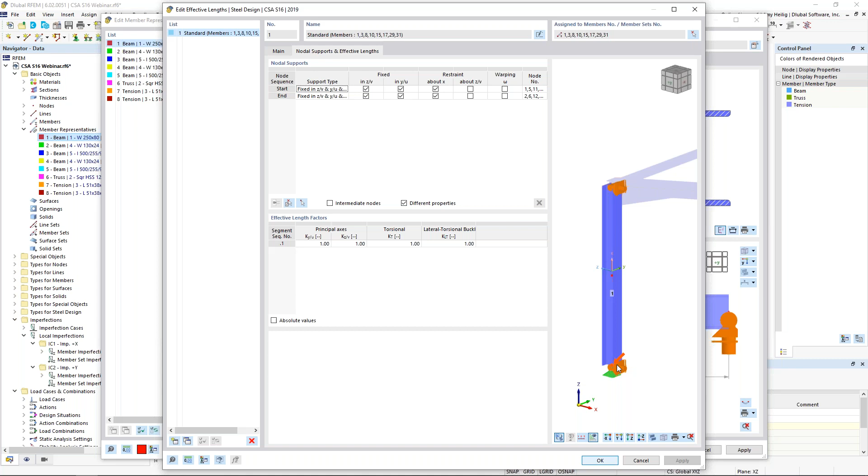So for this first definition type for our columns, I'll go ahead and leave these as default. Notice the first 3 degrees of freedom are fixed here for my intermediate supports. Now, these intermediate supports have nothing to do with global supports. Rather, we're just using them internally to calculate what those effective lengths should be used, or the unbraced lengths, for the actual design according to the CSA standard.

So when we click OK, what we should see here now are those intermediate supports shown at either end of the column. Now, additionally, we can apply a local section reduction. So if we create a new definition type here and take a look at a new reduction type, we can actually decrease the net sectional area if we need to.

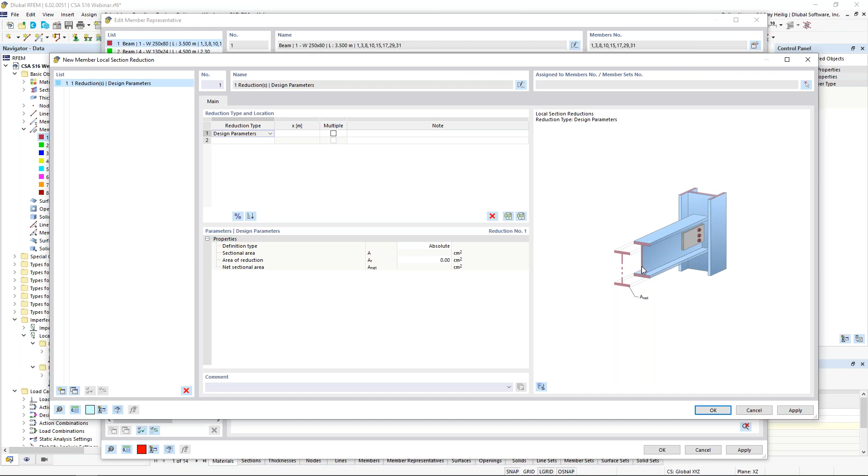So this might be important for something like tension design. We don't have that case today, so we'll just go ahead and leave that empty. So that's fairly straightforward for those columns.

But let us take a look here at our third member representative. So notice this group together, these 4 beams here at the outer moment frames of our structure. So those are all identical, and the program grouped those together in that member representative. Well, initially we go into the individual member settings to turn back on the design properties.

I click OK, and rather than inputting the unbraced lengths for each individual member, we're once again going to do it here under the member representatives. We create a new effective length definition type. I can't use the definition type we previously set for the columns because it's different, so we create a new one. Remember the small trick of creating the type, clicking OK, and then going back in simply so we can see a nice little preview of those 4 members.

This is a little bit more complex for our intermediate supports under this second tab, because we have additional nodes, such as where this column and this beam are framing in, that we'd like to take into consideration. This gives us more capacity of the member when we're talking about stability design. So we have the ability to turn on intermediate nodes, and then we can graphically select this member back in the model. Notice the program automatically detects the intermediate nodes along the member length, where we can apply additional intermediate supports.

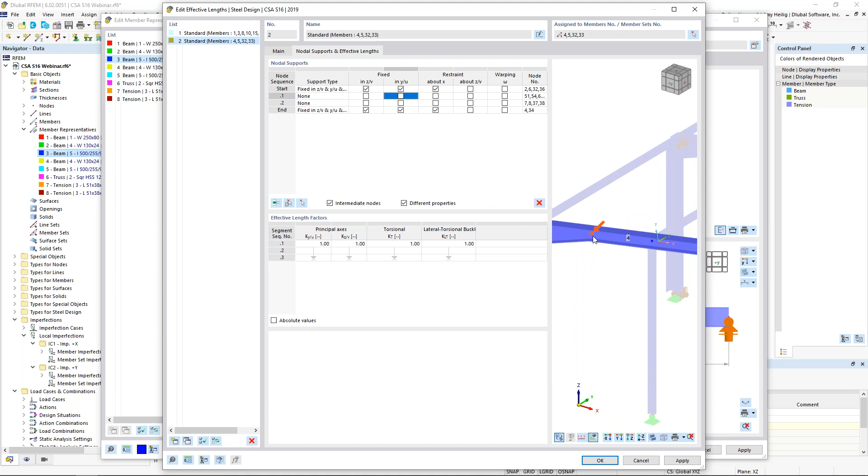We'll begin with this first definition. We'll leave this as default, where we have restrained the first 3 degrees of freedom. Now the second node really means nothing - it's just to indicate where the transition of our taper begins and ends, so we'll leave all of these fixities empty.

The third node is where this member has the column framing up in the strong axis direction and this tube framing in the weak axis direction, so we can turn on those fixities with the first 2 degrees of freedom. Finally, at the peak, the apex of our structure, same concept - we have that column in the strong and weak axis direction, so perhaps I want to turn on the restraint for rotation about the member's local x-axis.

So a couple things to note here. All of these intermediate supports are completely dependent on the connection type. Any software is not going to be able to automatically tell you what the unbraced lengths are - it's completely up to the engineer. We try to guide you with locations to apply these intermediate supports, but you'll need to come in and determine which degrees of freedom are fixed or released.

The other thing to note is that when we fix the member in the weak axis direction, we have the eccentricity type down here with this drop down. We can tell the program if it's braced only at the upper flange, only at the lower flange. If we leave this to none, the program assumes it's braced at both the upper and lower flange. This is nice because in RFEM 5, according to the CSA standard, we always assumed both flanges were braced at the same time, but now in RFEM 6, we give you the capability to determine if it's one or the other or both.

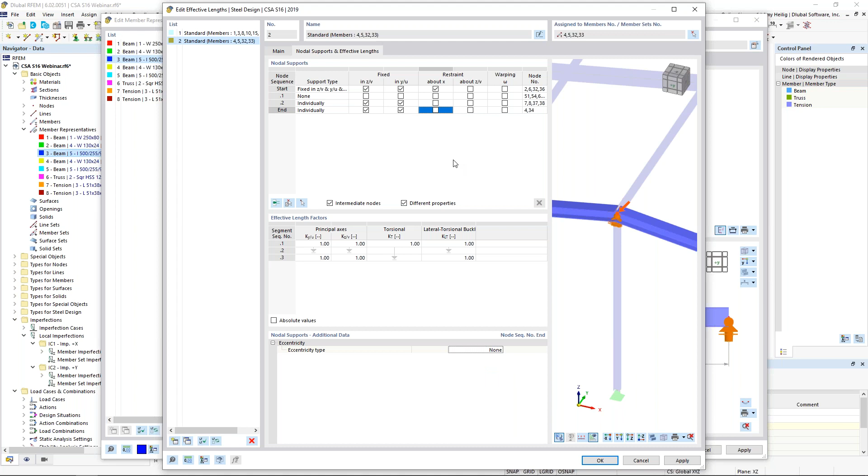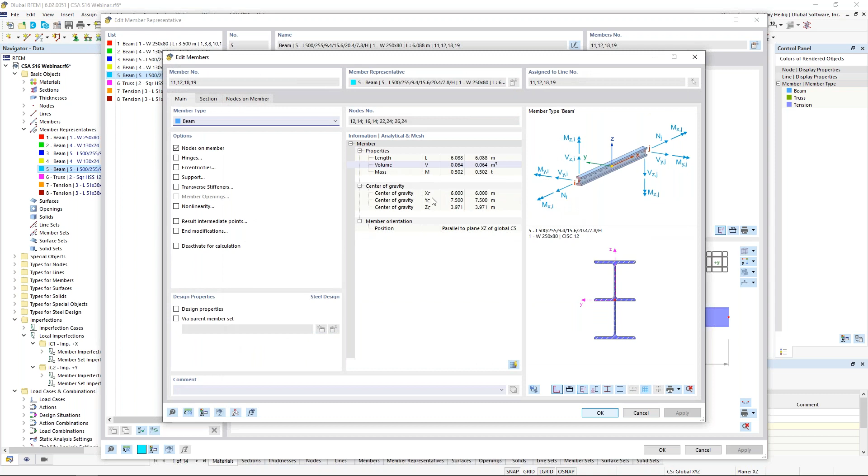Now that we've defined the intermediate supports for these additional members, the final members I'd like to design are these interior beams. So for the final time, we'll go to our member representative number 5, and we can see the relevant 4 members highlighted. We'll go back into the definition settings for each individual member, turn on the design properties, click OK, and create our final effective length definition. Remember, I create the definition type, then go back in to edit it so I get my nice view of my members.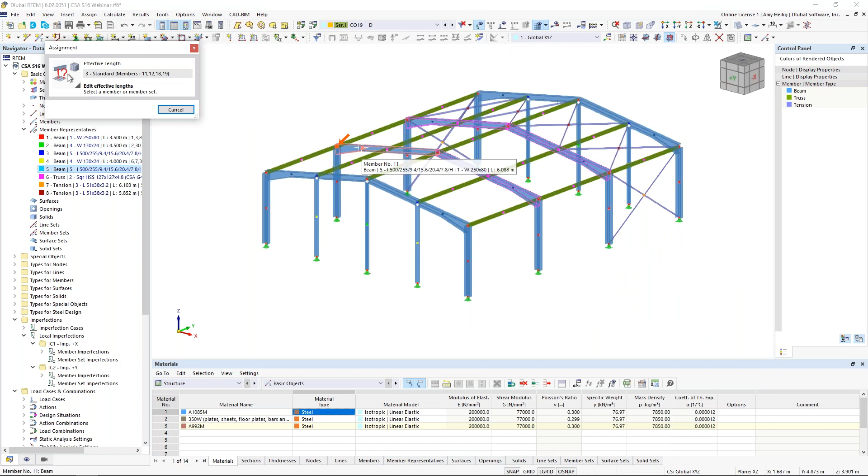This is going to be very similar to what we just saw for the previous settings - there's just a small difference. We do want the program to detect those intermediate nodes so we can graphically select any one of those 4 members. For the first nodal point, we'll leave this as the program has suggested - the first 3 degrees of freedom are fixed. Our second node means nothing.

The third node here, we only want to restrain in the weak axis direction - we don't have any column framing up in the strong axis direction. Finally, at the peak of our structure, same concept - we only have the weak axis direction restrained. We click OK, and now those effective length definitions are complete.

So just to touch on these final 2 tabs here, the ultimate configuration and serviceability configurations.

We do have two default settings here, but you can come in and create additional definition types or modify this default. This is just information specific to the CSA standard for ultimate limit state calculation, and we can turn various options on or off here.

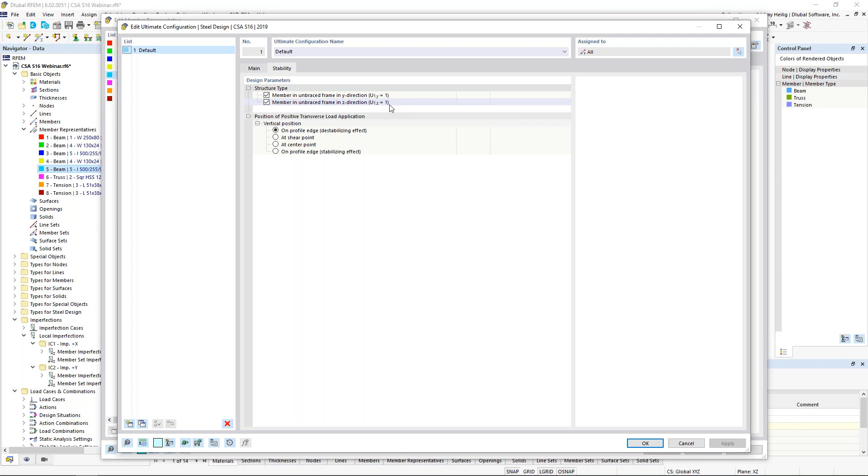Under the Stability tab, remember I mentioned that U(1) factor in chapter 13, that we can set this to 1.0 if we include P-little-delta effects. Well, we have this automatically turned on by default, so U(1) is equal to 1.0 because we do consider P-little-delta effects.

The serviceability configuration is quite straightforward here. We have our limiting deflection ratio for serviceability checks. So if the member is supported at both ends, we'll use L/360. If the member is a cantilever, we have L/180, but you can go in and adjust these limiting deflection ratios as you see fit.

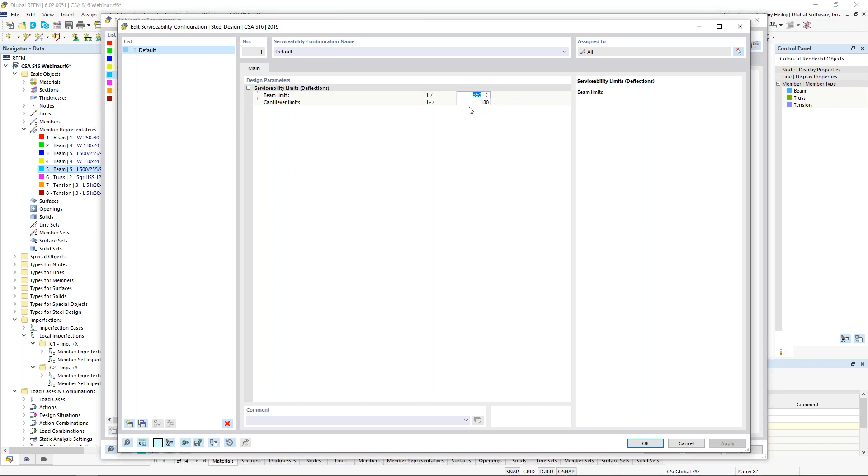The final tab is design supports and deflection. If I do absolutely nothing within this particular tab, the program is going to assume that the member is fixed or supported at the member start and the member end. The full length of the member will be used and will refer to that L/360.

If we have a cantilever, then we would want to define a design support at the member start or the member end, and then we'll refer to that L/180. Alternatively, if we have some columns framing up into our members, just to give us a little more capacity with those serviceability checks, we could define additional supports at the internal nodes. So taking the conservative approach for our example today, we'll just leave everything fixed at both ends, as well as using the full member length.

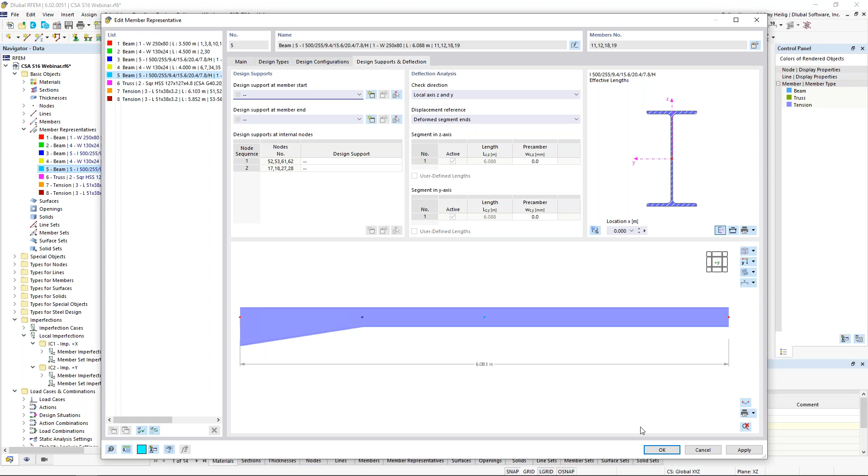So we're finally done with all of that input data specific to the Steel Design add-on as well as the CSA standard. We're now ready to run our calculation.

One final thing to do under the Steel Design add-on within our table: notice here that the design situations are listed. We're already familiar with these, and we just simply relate these to the relevant limit state type. So factored load combinations go with the ultimate limit state. Our unfactored load combinations from our serviceability design situation go with the serviceability limit state design.

The objects to design, by default, the program selects all members. Notice that we have some members shown here in red, just simply because we haven't turned on the design properties, we haven't defined effective lengths for those. So the program would just give us a small error if we left those in there.

Now, alternatively, we can turn off this checkbox and individually set the members and member representatives. Or a nice little tip here is we can just simply hit Control-C to copy these members and then hit Control-V to remove them from the design. Notice those disappear from the not valid or deactivated list.

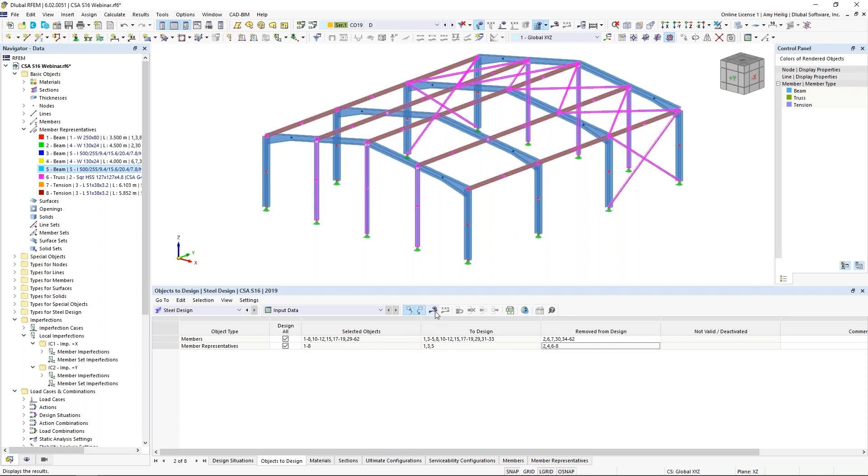We're now ready to run our calculation, so we can simply hit the option here to start that, and the program will cycle through all of our factored load combinations, all of our unfactored load combinations. You can see it run through those simultaneously here rather quick, and we also are running this Steel Design add-on, again, for that member design ratio specific to the CSA standard.

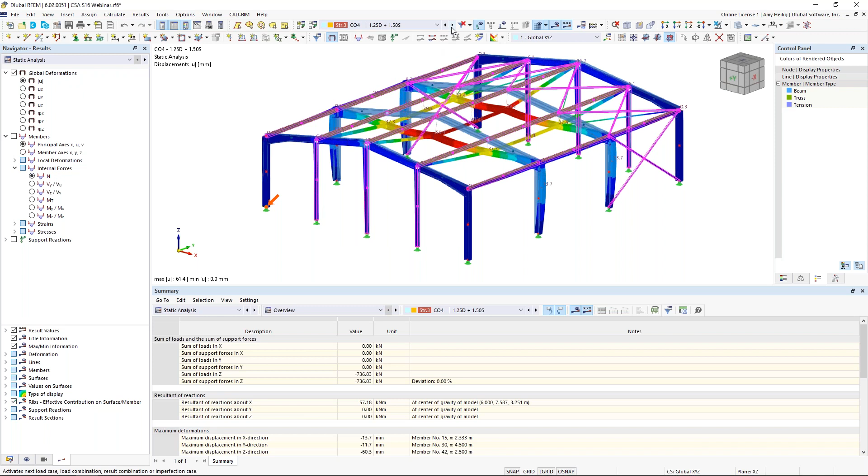So with the results in the navigator, we have both the static analysis and the steel design. Looking at the static analysis, we can move to any one of these load combinations just to view, let's say, the applicable global deformations of the structure. We also can take a look at the member internal forces, such as the axial forces or the bending moments.

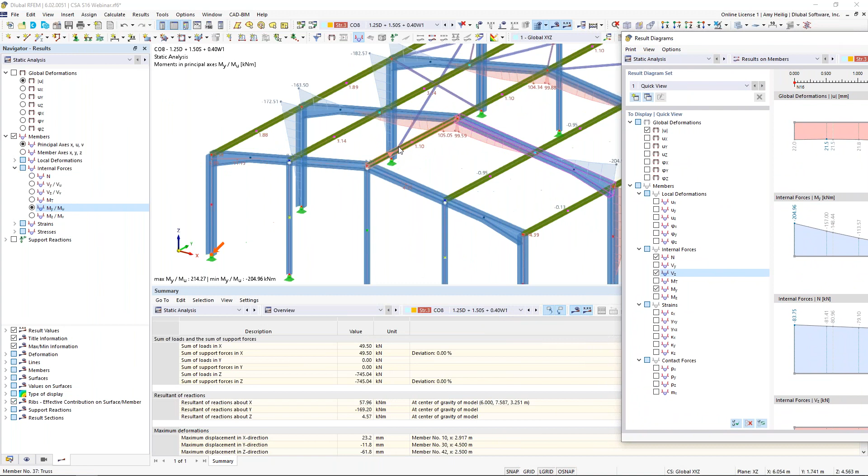We can right-click on any one of these members, and under the member options, we have what's called the results diagram. The results diagram allows me to turn on and off various internal forces or deflections to see what's going on along the member length in a little bit more detail. We also can move this results diagram to an additional monitor and continue working concurrently in the model, and the results diagram will actually update in real time.

All of the information shown graphically is available to us in table format as well. So we're currently viewing this static analysis here, and under our second dropdown, we can view results by member, for example. So if we take a look at the internal forces, we can go ahead and click here in the table. Notice that the graphics are synced up to the table - that red arrow is showing me exactly where that internal force is located. We can export this to Microsoft Excel, do further sorting capabilities.

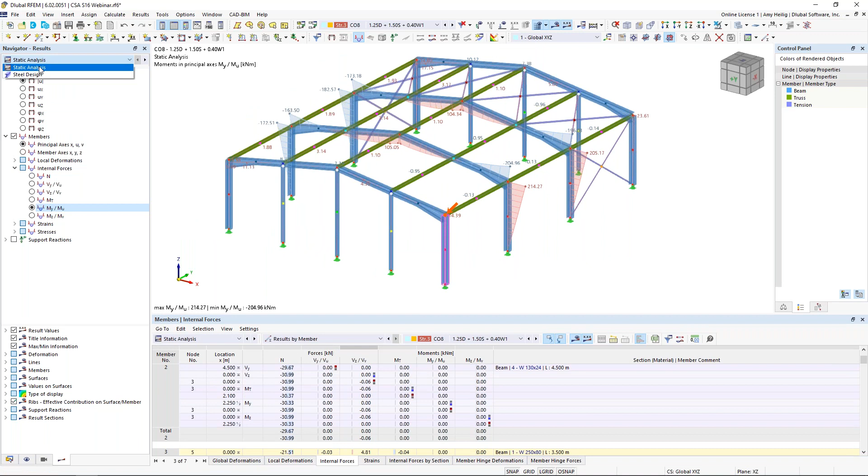That's all possible here. But additionally, we've also run the steel design at the same time. So we drop down to this option now, and we can see within the table, we're currently looking at the steel design results.

We can view the design ratios based on the members or member representatives. If we look at the design ratios by member, we have actually grouped each member here. Again, this table is synced up with the graphical view to show you every single design check.

Applicable within the CSA standard, not just the controlling check. But if we're thinking, well, I'm really only interested in the controlling design ratio, we can always use our filter option up here in the table to filter to the max. And now only those max design ratios are shown.

What else you'll notice is that when we're looking at one of the stability checks, we get a deflected shape shown here. This all has to do with that mode shape shown over here in the navigator. Remember, we are designing the lateral torsional buckling based on that eigenvalue analysis.

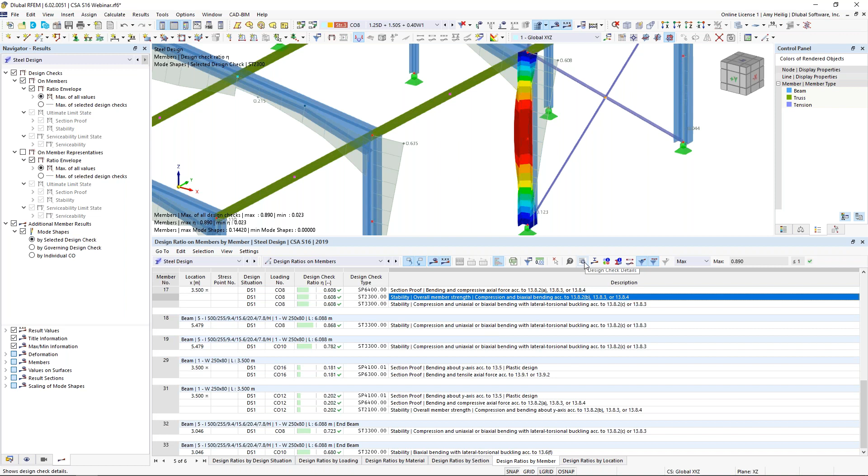This is very powerful within the new version, that we're now giving you all formulas line by line, so you can follow this entirely to determine how that ultimate design ratio was calculated. We're giving you all variables, all code references, how the section was classified. We can see all of that information shown here on the left.

We can add these calculations to our printout report as an image. The image will update in real time if we make any modifications to the model and rerun that calculation. So very powerful, and really trying to avoid that black box software, to give you as much information as possible so you can compare to hand calculations and really understand where the program's numbers come from.

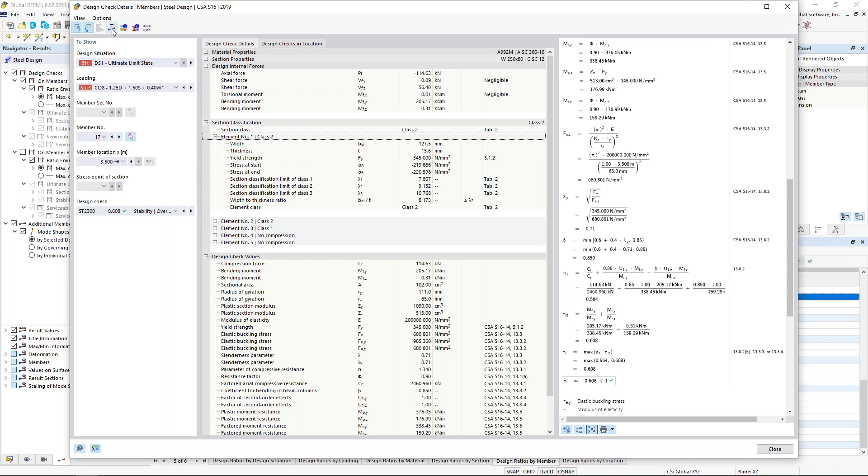One final thing to mention here is the results diagram in section. We can actually view the stresses of the member at this particular X location. For example, normal stresses due to the normal force, normal stresses due to bending moments, shear stresses, or even von Mises stresses. So if we're interested in the actual stresses of the member rather than just the simple design checks from the CSA, that's all available directly within this same dialog box.